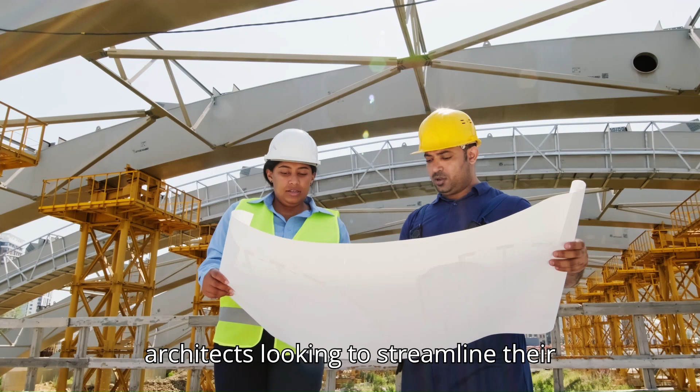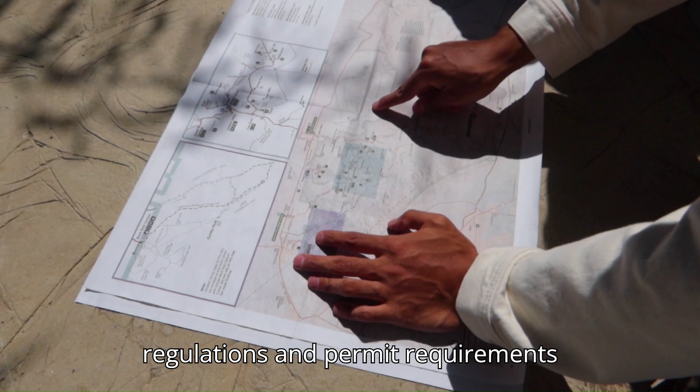Second, industry professionals such as engineers and architects. Engineers and architects looking to streamline their workflow and enhance their business operations can benefit greatly from partnering with AM Design. By collaborating with us, they can focus on their core competencies and innovative design projects while we manage the intricate and time-consuming process of obtaining building permits. AM Design's comprehensive understanding of local regulations and permit requirements ensures a smooth, efficient, and compliant approval process. This partnership allows architects and engineers to deliver their projects on time and within budget, providing their clients with exceptional service and quality outcomes.

Let's dive right into it. Building Permit Series: Two-Dwelling Unit Houses.

Click on Option 3 and request a digital copy for non-commercial use. You must fill in all the information required and hit Submit at the bottom of the page. It might take a couple of hours, but the OBC Volume 1 and 2 will be emailed to you in a PDF format.

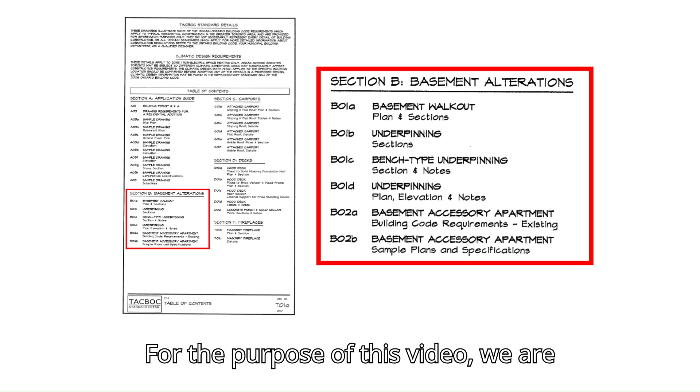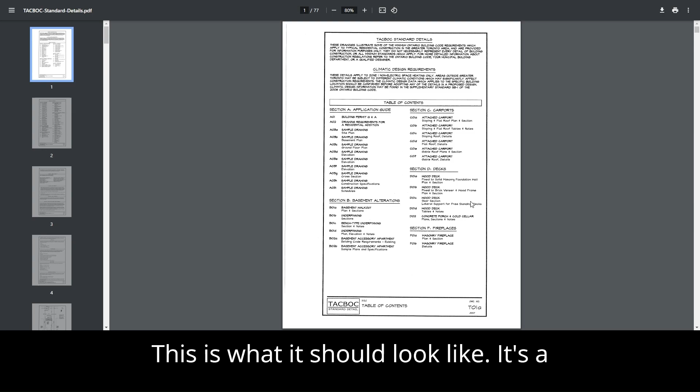Second, the TACBOC Standard Details. For the purpose of this video, we are going to focus on Section B, Basement Alterations. Search for TACBOC Standard Details Download. Many pages should host this file. I am going to look at the first result that appears to me. This is what it should look like. It's a 77-page document full of standard construction details, drawings, and specifications that will facilitate things for us.

The third and final resource for this video is a provincial webpage dedicated to those who are seeking to add a second unit in their houses. The link will be available in the video's description. This page will be our main guide since it covers almost all aspects of this type of application and is organized in a very intuitive and user-friendly manner.

I will take this opportunity to emphasize their disclaimer and adopt their wording as my own. This document is provided for convenience only and should not be relied upon as a substitute for construction, engineering, architectural, or legal advice. The Ministry of Municipal Affairs and Housing does not assume responsibility for errors or oversights resulting from use of this document. Let's use the province checklist as a guide.

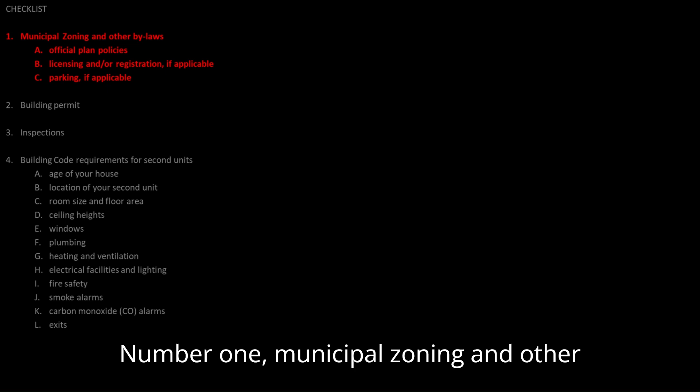Number 1. Municipal zoning and other bylaws. I chose the city of Guelph to exemplify this step. Every municipality is slightly different, so it might differ from city to city, but the concept should be fairly similar and applicable to most places in Ontario.

Another smart resource would be to contact the city directly asking for clarifications. You can typically call or email them. However, be diligent and have your questions organized and clear before doing so.

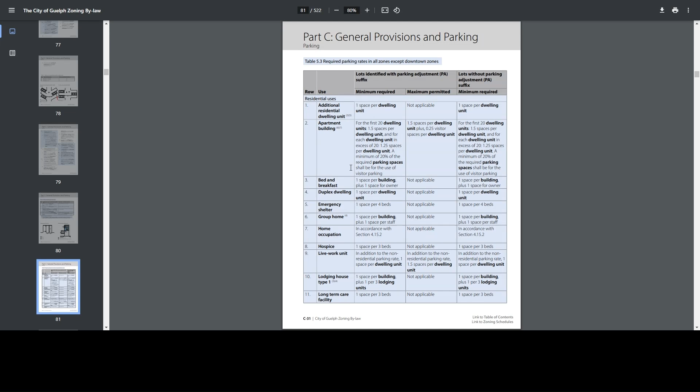In the bylaw document, you should find all the information for completing item number 1 of the checklist. The document brings all the official plans and policies into effect. Back to our case, here we can see the required number of parking spaces, for example.

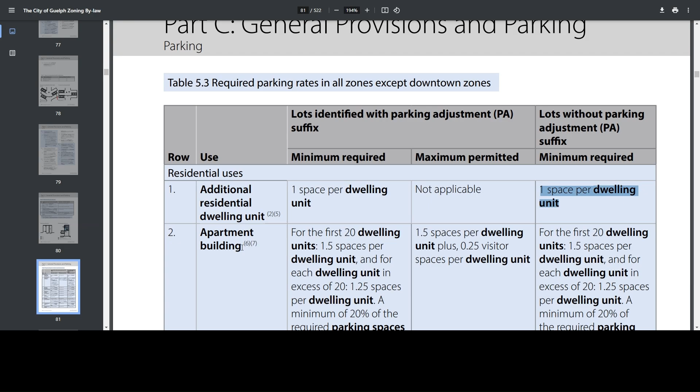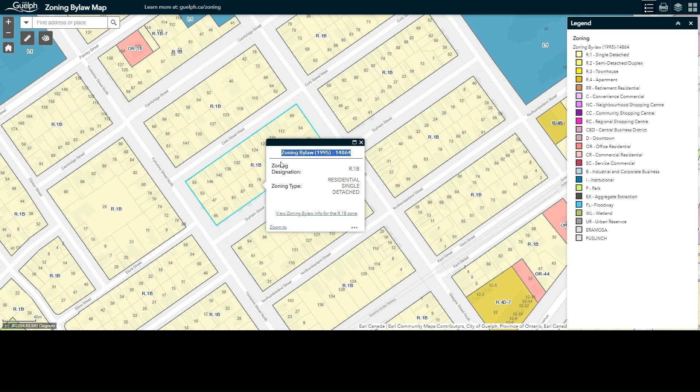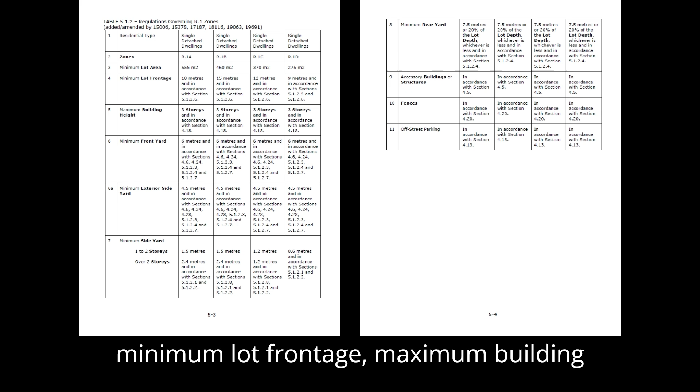And this is the interactive zoning map. Residential zones are typically labeled with the letter R. Once you pick an address, it shows you a link for the zoning bylaw info. This can be very handy and point you to the appropriate bylaw section, which tells you critical info such as minimum lot area, minimum lot frontage, maximum building height, setbacks, etc.

Another way of quickly finding second unit zoning and other bylaws information is to search for it directly using these terms. Here, Google directed us right to the desired page, eliminating the hassle of navigating the city's website, which can be time-consuming. This page brings us a summary of the previously seen bylaws and highlights key factors you should comply with when submitting your permit application.

In this link, for instance, we can find more about the fees and documents required. Here you can find what the City of Guelph calls the Additional Residential Dwelling Unit, ARDU, registration form.

You must read carefully and fill the form entirely with accurate information. This form will need to be submitted together with your application later on. This completes item number 1 of our checklist.

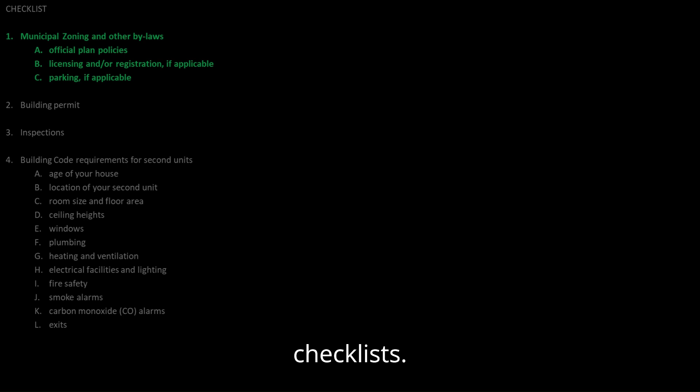Let's jump to the next step, which is in fact getting a building permit. Essentially, you will need to put together information in these two main groups.

Drawings, these might consist of, but are not limited to, floor plans of all levels, a site plan, a survey, elevations, sections, details, etc. For the purposes of efficiency of this video, I won't be able to teach you how to draw and prepare these drawings.

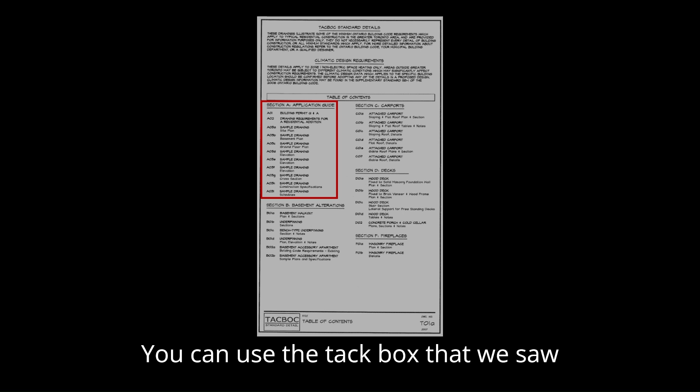However, if you are determined to do it yourself, I would encourage you to research online methods of preparing architectural drawings and how to operate drafting software. You can use the TACBOC that we saw earlier as a reference.

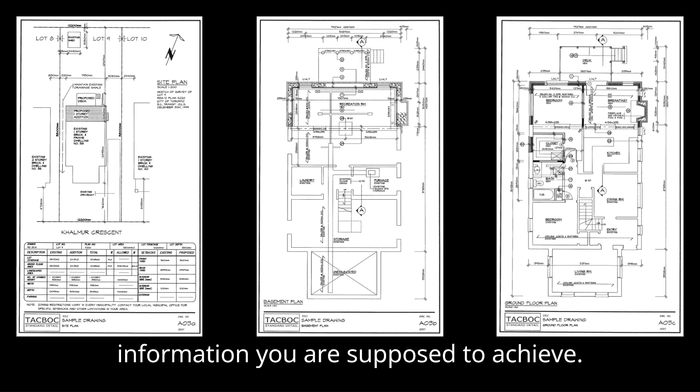Section A brings a sample of drawings. By analyzing these drawings, you can get a sense of the level of detail and information you are supposed to achieve. Documents and forms, these are the most common requested ones.

Schedule 1 and the Additional Residential Dwelling Unit Registration Form. Note the name of the registration form might change from city to city.

Let me quickly show a practical example of what we just discussed. Using as a case study the City of Guelph, let's go to the permit page.

Then residential building permits and inspections. Here you will find links for all kinds of permits.

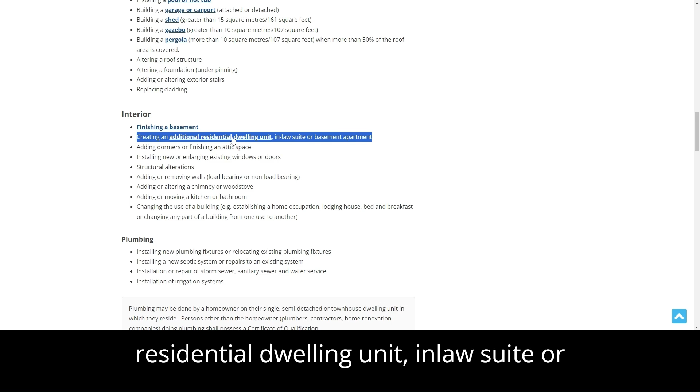The one that describes what we want is this one: creating an additional residential dwelling unit, in-law suite, or basement apartment. If your scope of work involves more than one type of permit, for example, a second unit and a new deck, you need to check the requirements for both and meet them all in your application.

So here they simplified the process in a few steps. Step 1, permit application. Guelph, like other municipalities, accepts applications electronically, which speeds up the process.

Step 2, submitting drawings. Step 3, additional documents. Step 4, fees. Once you submit your application, or when it is accepted, you will be requested to pay the fees. Step 5, inspection requirements. Other important things to remember.

Depending on your scope of work, some places will ask you if the contractor you are hiring has a license or registration. If they do, you should provide their registration number for verification. If they are not, the city may ask the homeowner to assume responsibility for the construction done by the contractor you choose.

Electronic applications are becoming more popular, and they can make the overall process move faster when you submit a complete application, meaning you have not missed any document, drawings, or form. The municipality needs to provide you with a response within 10 business days. This completes item number 2 of our checklist.

Moving to item 3, inspections. After receiving your building permit, municipal building inspectors will review the work at different stages of construction, including framing, insulation, plumbing, and interior finishes, as required by the building code.

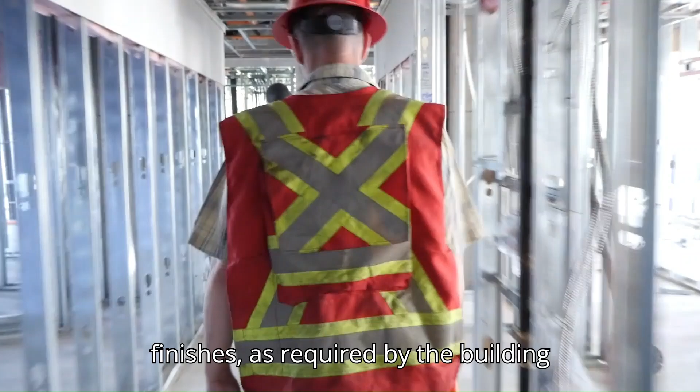It's important to confirm with your inspector what needs to be inspected. You or your agent must notify the building department when each stage is ready for inspection.

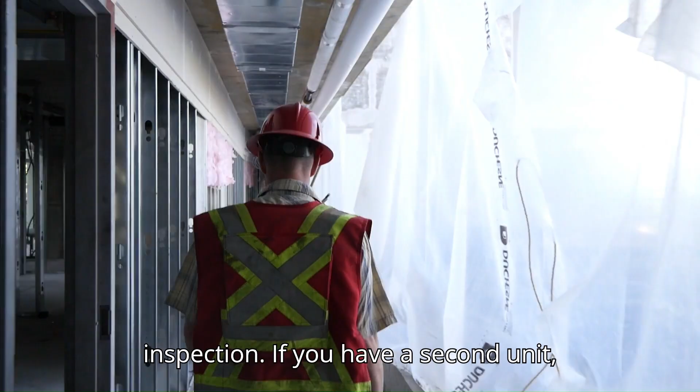If you have a second unit, whether new or existing, ensure it meets safety standards. For concerns about an existing second unit, contact your local building department.

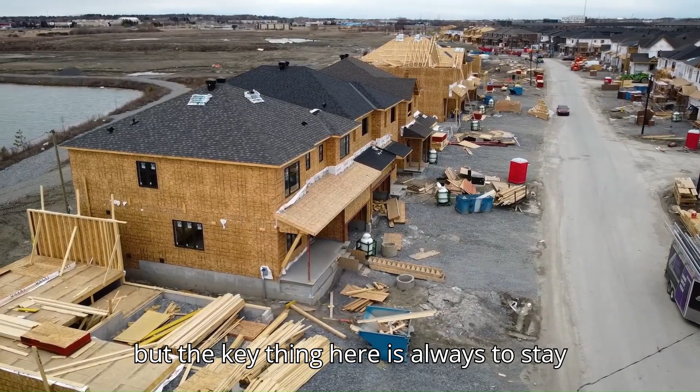We won't dive too deep into inspections, but the key thing here is always to stay in touch with your inspector and make sure to coordinate with him and your contractor the inspection dates and phases. This completes item number 3 of our checklist.

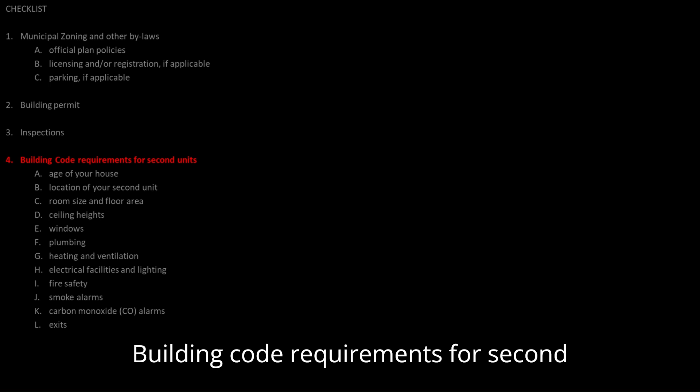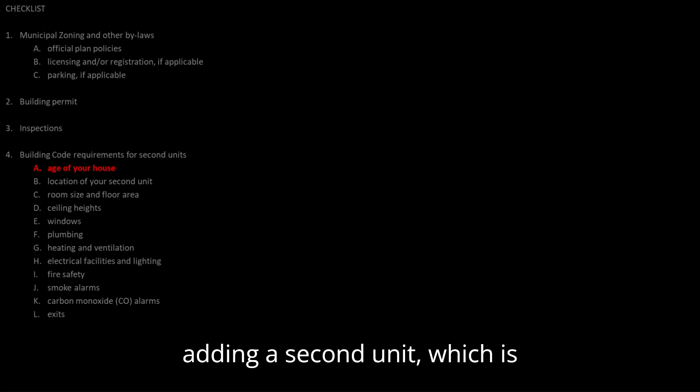Building code requirements for second units. This is the last item and the most detailed one. Age of your house. The age of your house matters because it will determine how much flexibility you will have when adding a second unit, which is technically considered as a renovation.

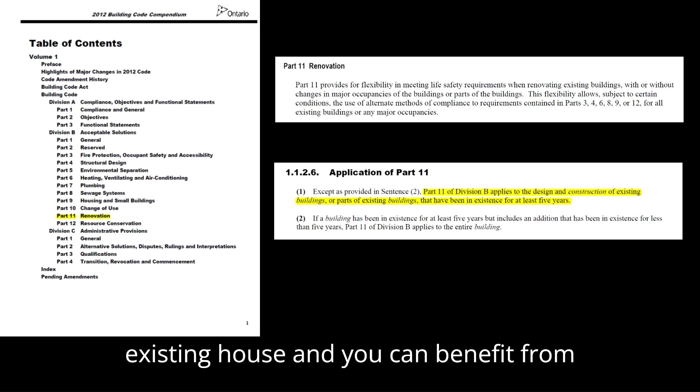Part 11 of the Ontario Building Code is dedicated to renovations. Look at these 2 fragments extracted from the code. If your house is more than 5 years old, it is classified as an existing house, and you can benefit from compliance alternatives described in Part 11 of the code.

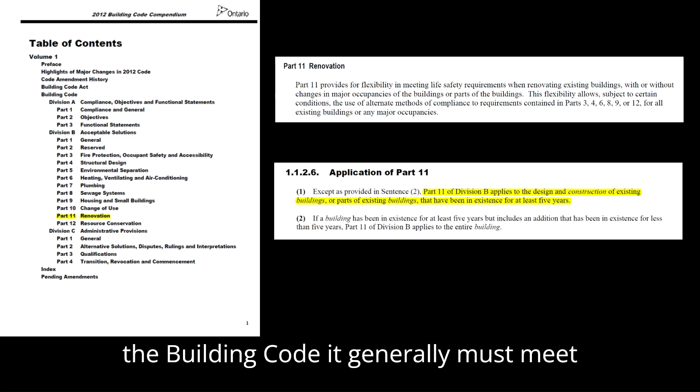If your house is less than 5 years old, then it is classified as a new building, and under the building code, it generally must meet new construction requirements.

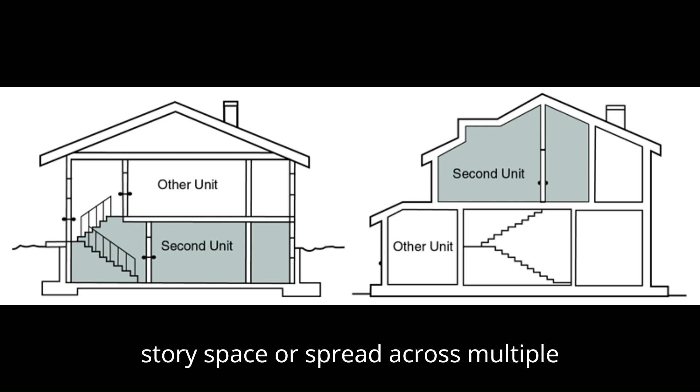Location of your second unit. You can construct a secondary unit in any area of your home. It can be a single-story space or spread across multiple levels. Many secondary units are commonly built in the basement or attic. The building code regulations may differ depending on the location of the second unit within your house.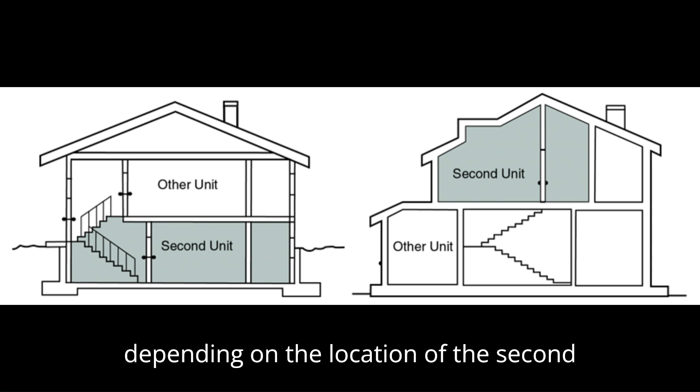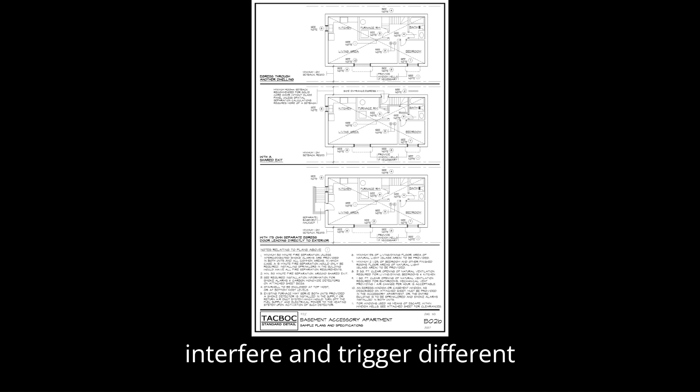Back to our TACBOC details. In Section B02B, we can see an example of how the location of the second unit will interfere and trigger different requirements. In this example, the second unit is in the basement, but the same concept can be applied when the second unit occupies other areas.

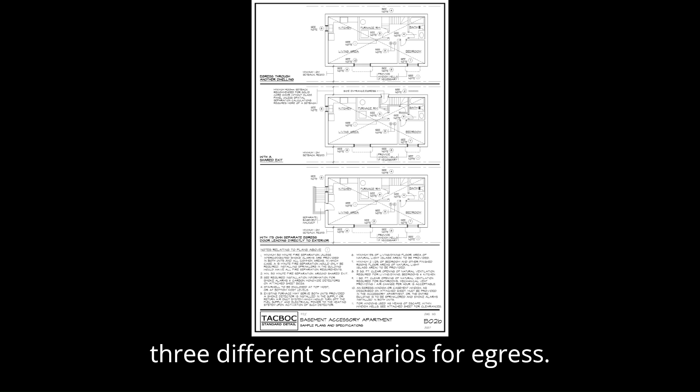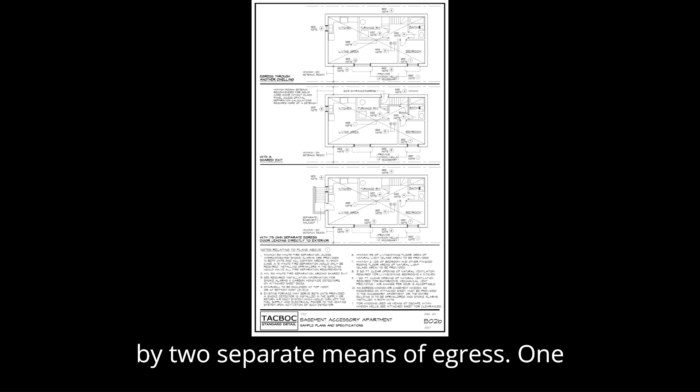Here we have 3 different scenarios for egress. Each of them has its own particularities and requirements, but the common factor is that the second unit should be served by 2 separate means of egress, one being an egress window and the second one being either an independent or a shared exit. We will cover it in more detail on exits and windows.

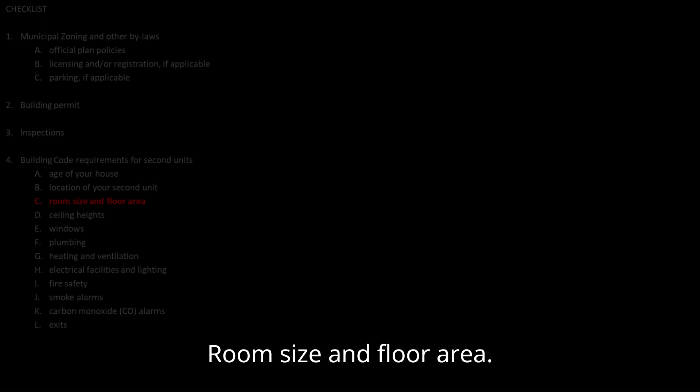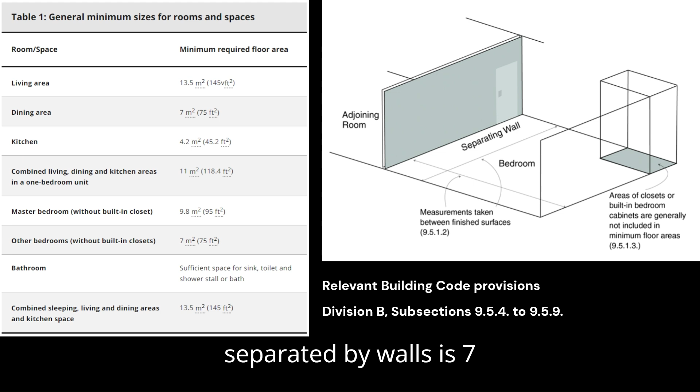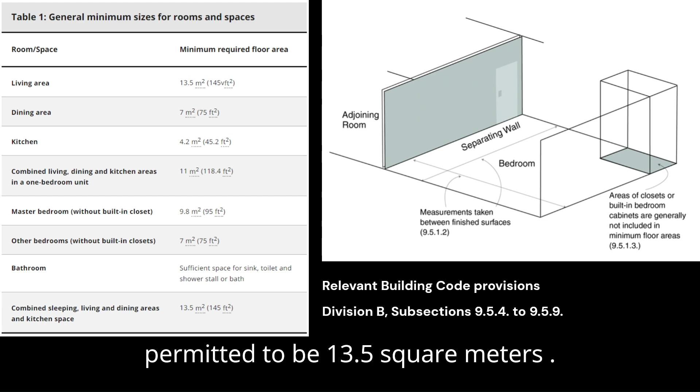Room size and floor area. The building code sets out minimum room sizes in dwelling units, including second units. Room sizes vary depending on whether rooms are separated by walls or the unit is open concept. For example, the minimum area of a dining room separated by walls is 7 square meters, 75 square feet, while an open concept bachelor unit combining sleeping, living, and dining areas and kitchen space is permitted to be 13.5 square meters, 145 square feet. Ceiling heights.

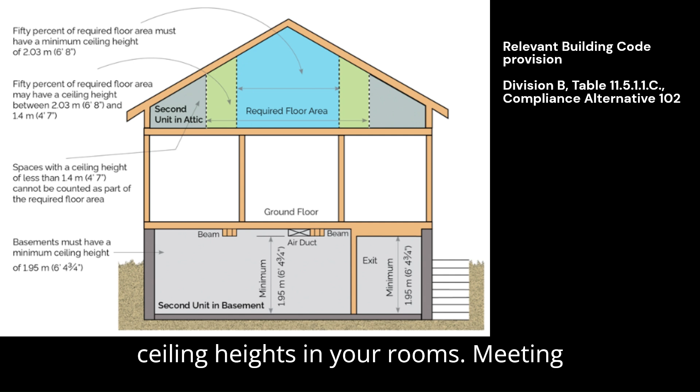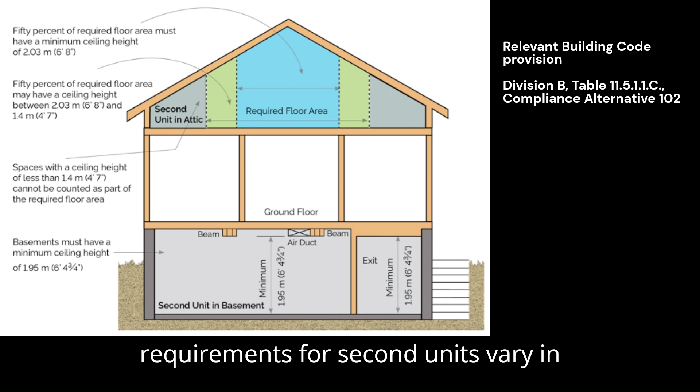You are also required to have minimum ceiling heights in your rooms. Meeting the ceiling height requirements can sometimes be a challenge in an existing house. Choose the location of your second unit carefully. Ceiling height requirements for second units vary in different parts of your house, such as in basements and attics.

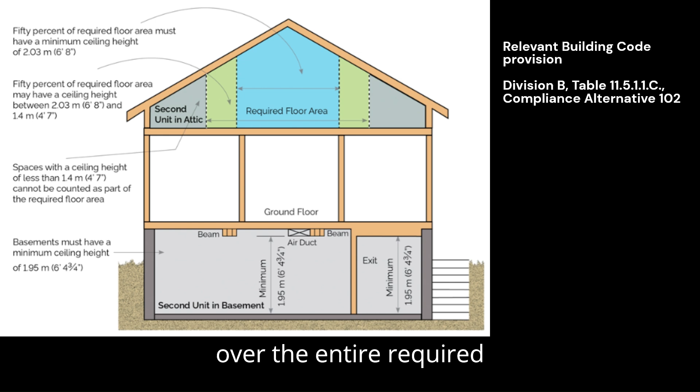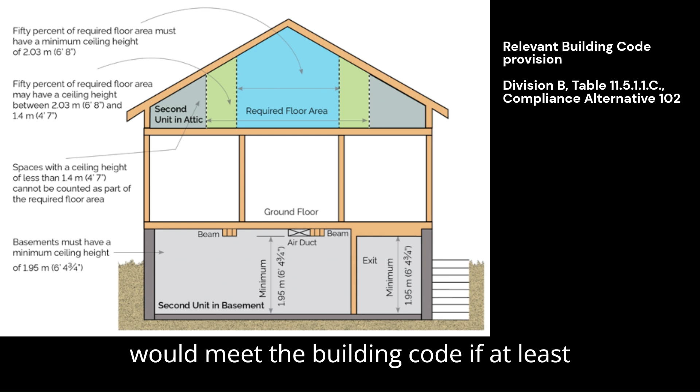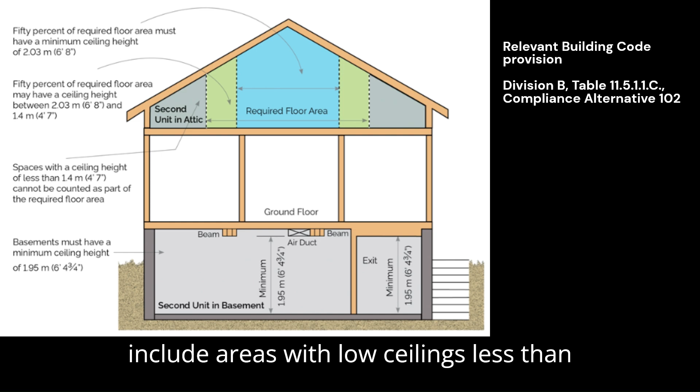A basement second unit is permitted to have a ceiling height of 1.95 m, 6 foot 4 3/4 inch, over the entire required floor area, including the route inside the unit leading to the exit. An attic second unit, which may have sloped ceilings, would meet the building code if at least 50% of the required floor area has a ceiling height of 2.03 meters, 6 feet 8 inches. But this does not include areas with low ceilings less than 1.4 meters, 4 feet 7 inches, high.

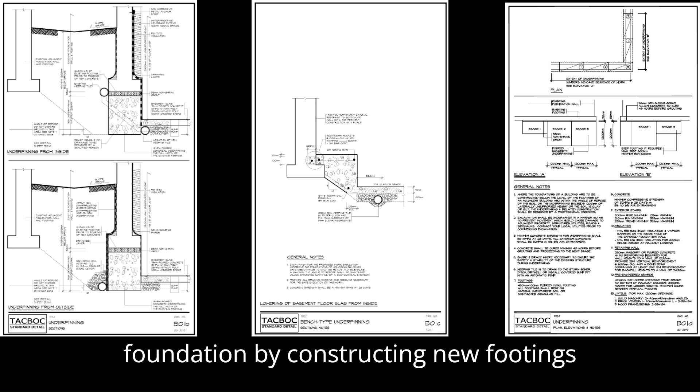If complying with ceiling heights is not achievable in the basement of your house, you might want to consider underpinning your basement. Underpinning is a method of increasing the depth of an existing foundation by constructing new footings beneath the existing footings. TACBOC covers and explains a bit about underpinning. Keep in mind that if you intend to do underpinning, depending on the extent of it, you might be required to get a professional engineer to sign off on your drawings.

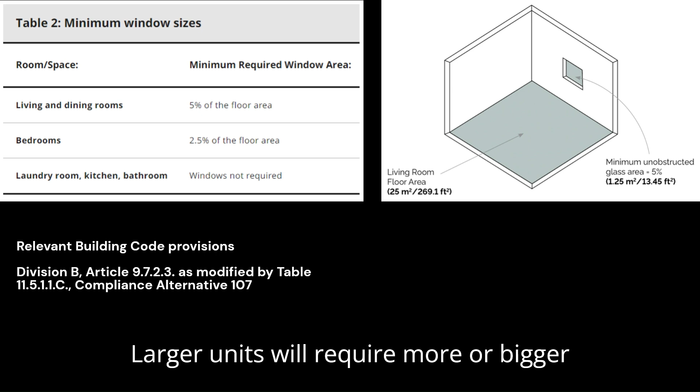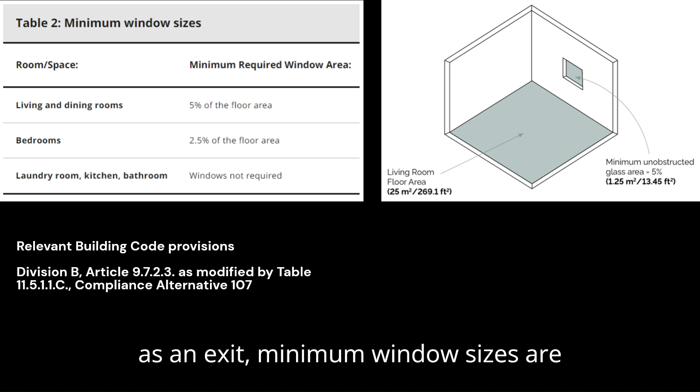Windows. Windows are required in a second unit. The size of windows you need is determined by the size of the unit. Larger units will require more or bigger windows. Window sizes are also based on what type of room they are in. Some windows can also be used as another way to exit a second unit. For more information, please see the section on exits. Where the window is not being used as an exit, minimum window sizes are described in the table.

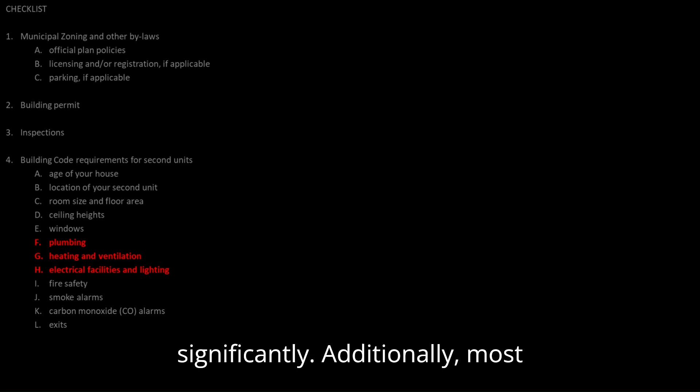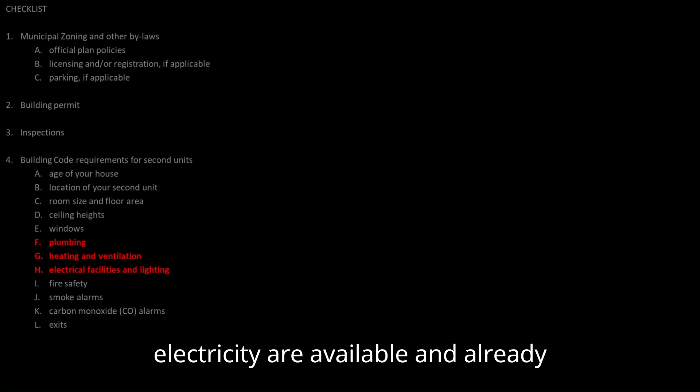We will skip the next 3 items, F, G, and H, because they can vary significantly. Additionally, most homeowners considering adding a secondary suite are likely to be in urban or densely populated areas where municipal utilities such as sewage, water, and electricity are available and already hooked up to the building. So achieving compliance with these items tends not to be a problem.

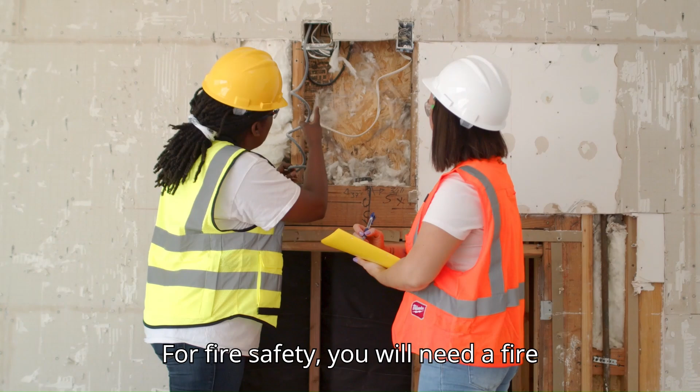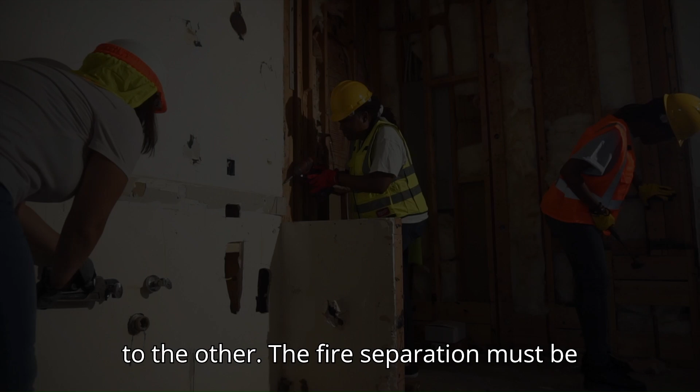Fire safety. For fire safety, you will need a fire separation between your second unit and the rest of the house. A fire separation acts as a physical barrier to slow the spread of fire from one part of the house to the other. The fire separation must be continuous and include protected openings if necessary, for example, fire dampers, in order to work properly.

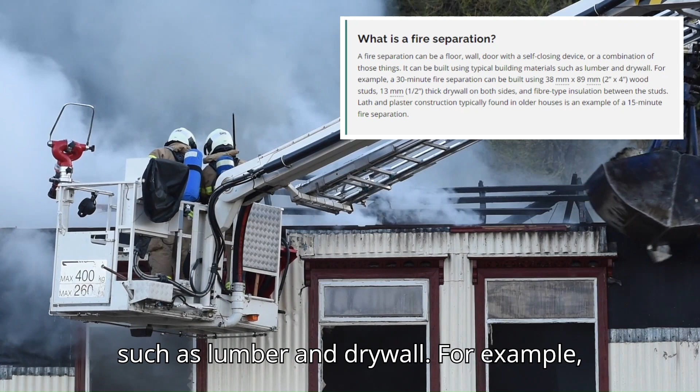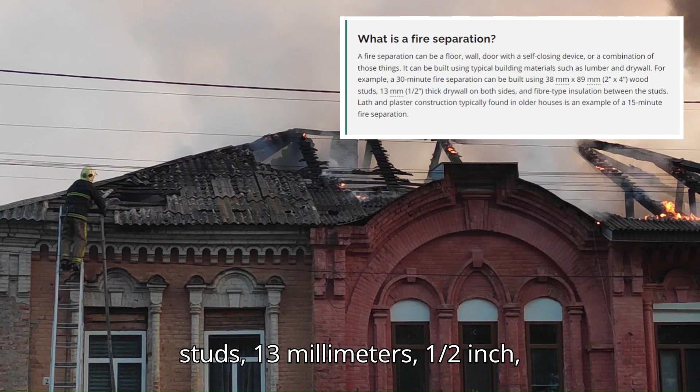What is a fire separation? A fire separation can be a floor, wall, door with a self-closing device, or a combination of those things. It can be built using typical building materials such as lumber and drywall. For example, a 30-minute fire separation can be built using 38 mm x 89 mm, 2 inches by 4 inches, studs, 13 mm, 1/2 inch, thick drywall on both sides, and fiber-type insulation between the studs.

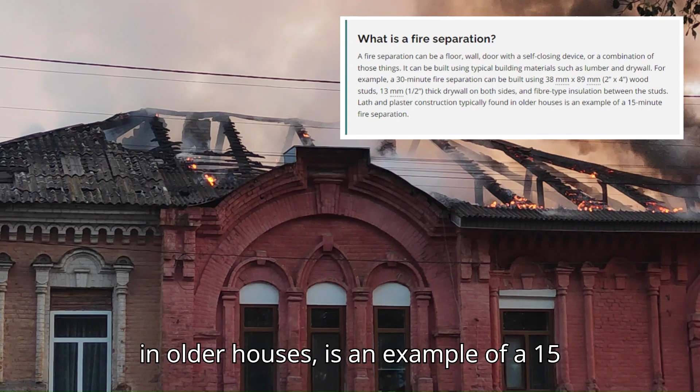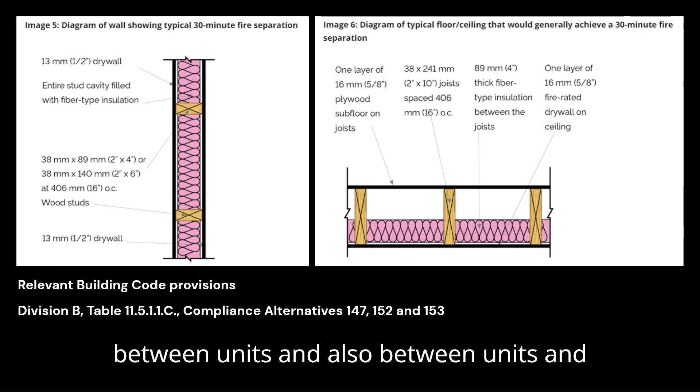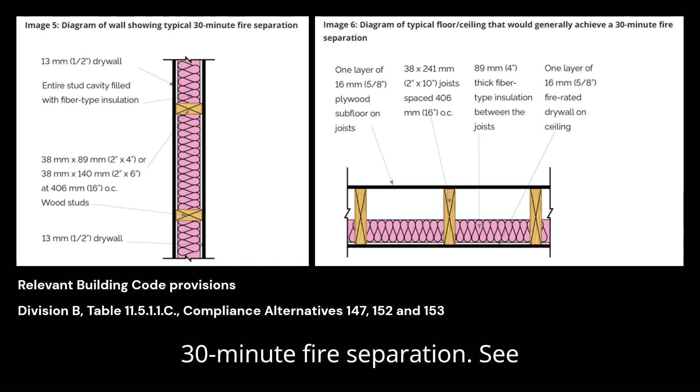Lath and plaster construction typically found in older houses is an example of a 15-minute fire separation. When adding a second unit, the building code requires a 30-minute fire separation between units, and also between units and common areas. If the renovation of your house to add a second unit requires the alteration of an existing floor or ceiling, you are required to make that a 30-minute fire separation.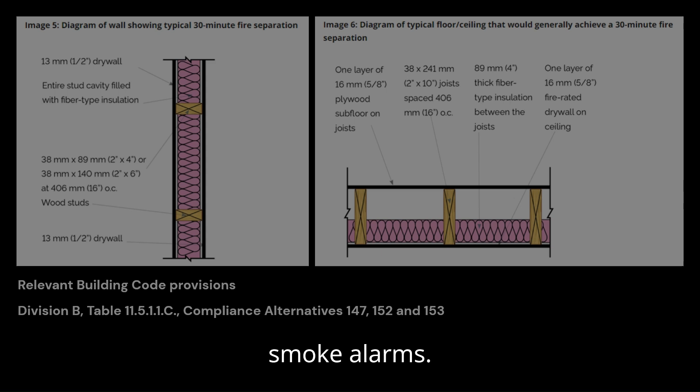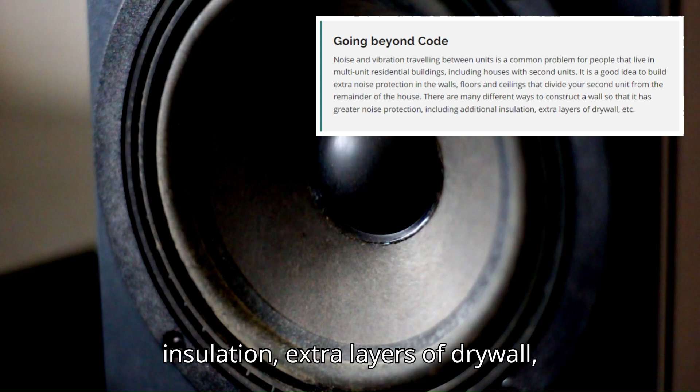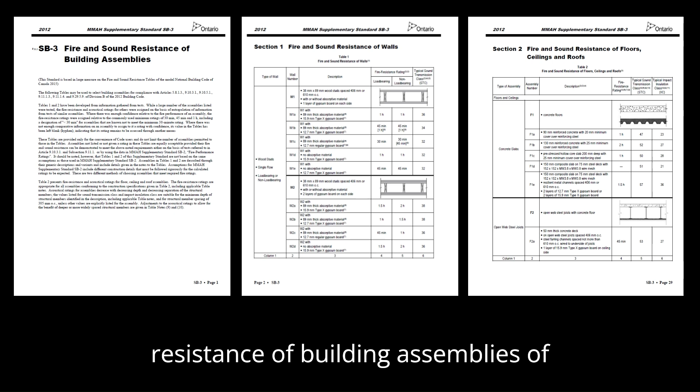See the floor/ceiling diagram. A fire separation can be reduced to 15 minutes if the entire house has interconnected smoke alarms. Going beyond code: noise and vibration traveling between units is a common problem for people that live in multi-unit residential buildings, including houses with second units. It is a good idea to build extra noise protection in the walls, floors, and ceilings that divide your second unit from the remainder of the house. There are many different ways to construct a wall so that it has greater noise protection, including additional insulation, extra layers of drywall, etc. Volume 2, SB3, of the Ontario Building Code brings an extensive and detailed guide for fire and sound resistance of building assemblies of walls, floors, ceilings, and roofs.

Smoke alarms, sometimes known as smoke detectors, are required in your second unit and must meet the CAN/ULC S531 performance standard. A label on the alarm will indicate whether it meets this standard. Your smoke alarms must also have a flashing light when they are activated. Smoke alarms are widely available at hardware and home renovation stores. Proper placement of smoke alarms is important: they must be located on every level of a house, outside sleeping areas—which, depending on the layout of a floor, can also count as the smoke alarm for that level—in each bedroom in the second unit, and in common areas of the house shared by occupants of both units, such as entrances and laundry rooms.

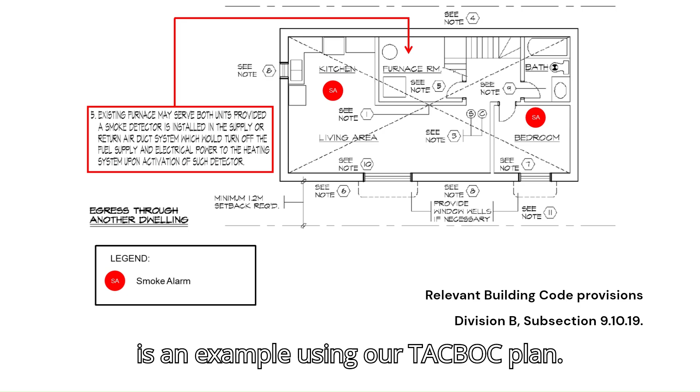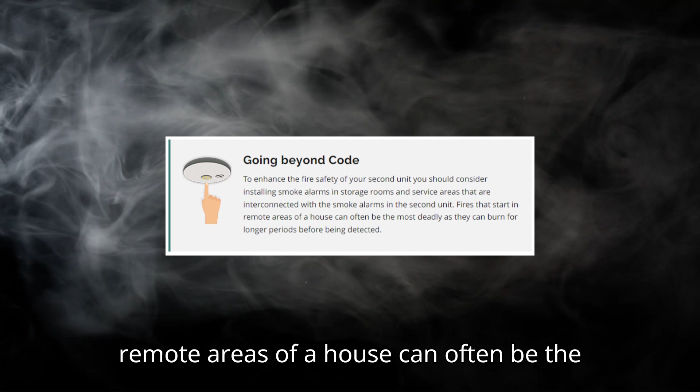Here is an example using our TACBOC plan. Going beyond code: to enhance the fire safety of your second unit, you should consider installing smoke alarms in storage rooms and service areas that are interconnected with the smoke alarms in the second unit. Fires that start in remote areas of a house can often be the most deadly, as they can burn for longer periods before being detected.

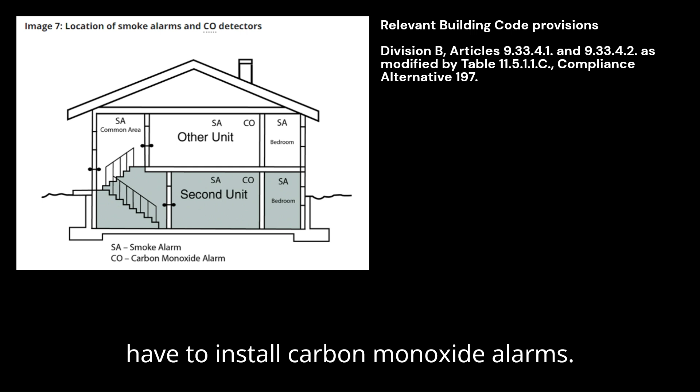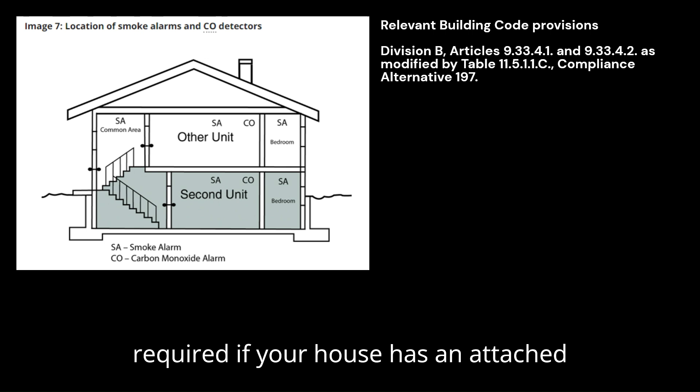Carbon monoxide alarms: in addition to smoke alarms, you may also have to install carbon monoxide alarms. They are required if your house has a furnace that uses natural gas, propane, or other similar fuels, and also required if your house has an attached garage. Carbon monoxide alarms can be either electrically powered or battery operated and must be located near bedrooms and sleeping areas in the second unit, and in the furnace room, if the furnace room is a separate space from the residential units.

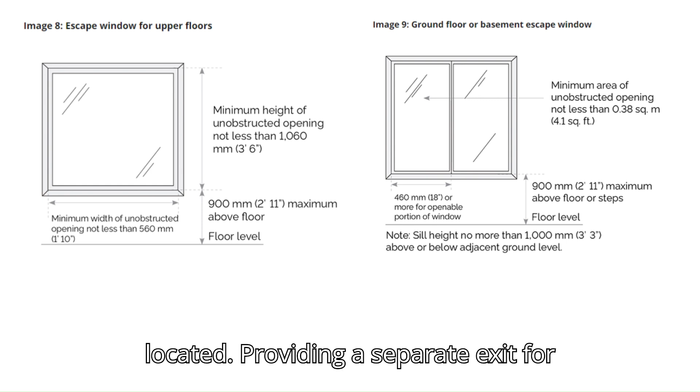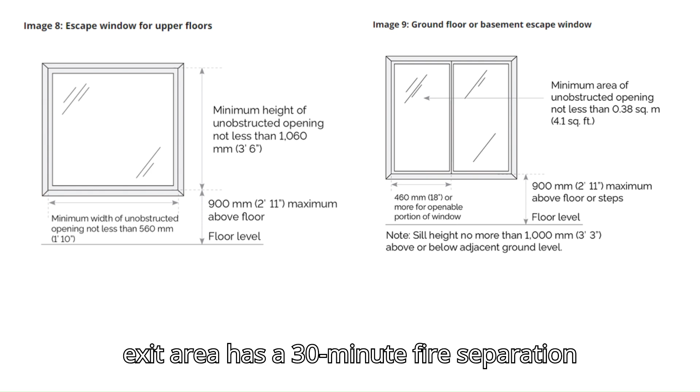Exits: your second unit needs safe exits. There are different rules for exits depending on where in your house the second unit is located. Providing a separate exit for the second unit is preferable. If that is not possible, a common exit for both units in your house is allowed if the exit area has a 30-minute fire separation and contains smoke alarms that are interconnected to both units.

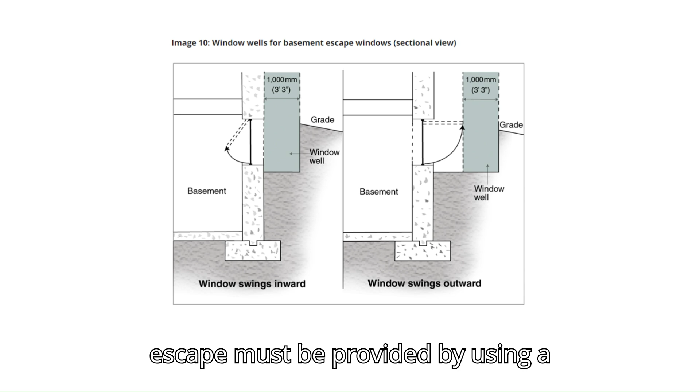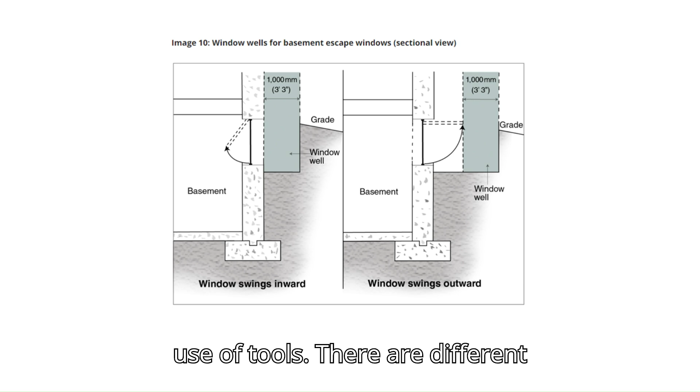In cases where the exit from one unit leads through another unit, a second means of escape must be provided by using a window. Windows that may be needed in an emergency as a second means of escape must be large enough for a person to get through and be easy to open without the use of tools. There are different requirements, shown in the diagrams below, for means of escape windows depending on whether they are located in the basement or upper floors.

That wraps up our checklist for the second unit and leads us to the end of this presentation. We hope we clearly explained the overall permit process and provided you with valuable insights.